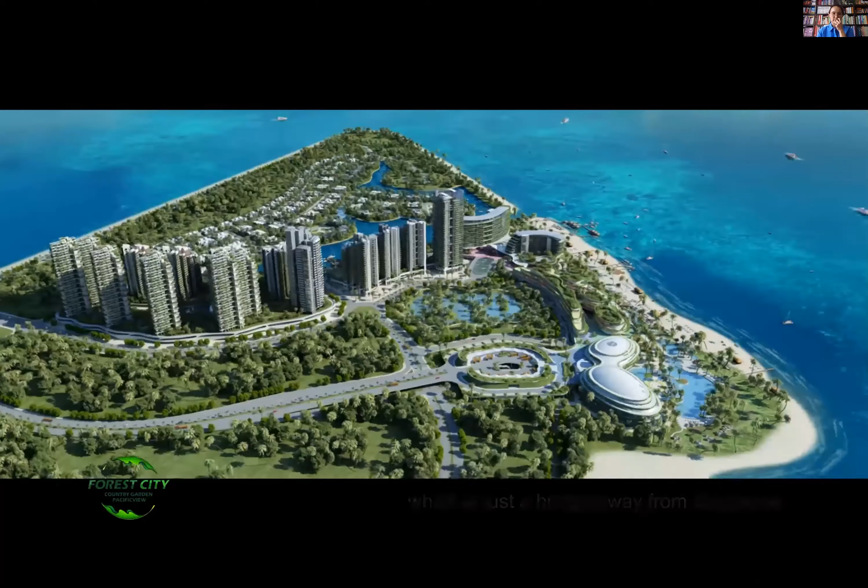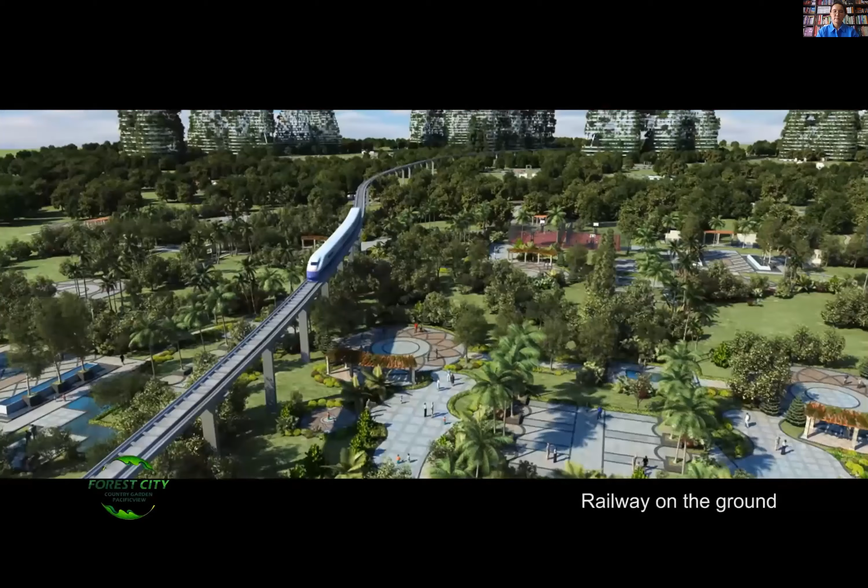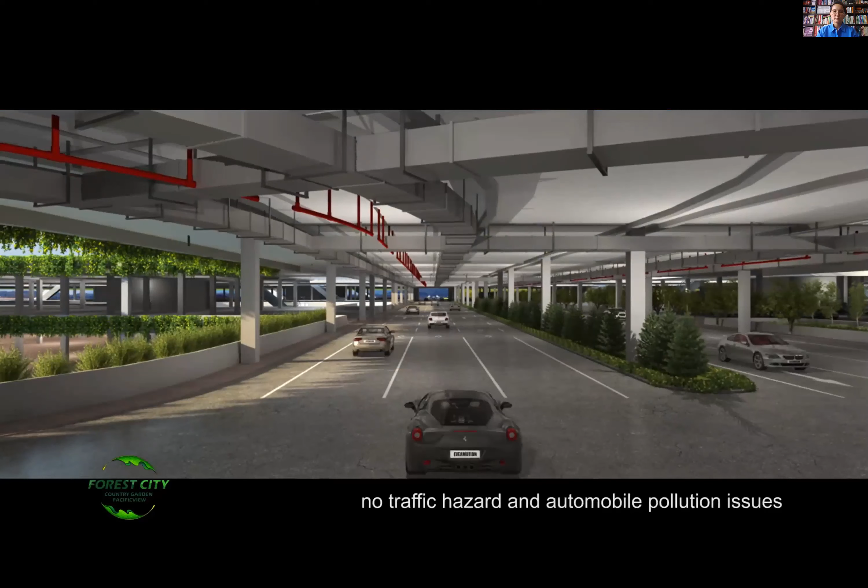Forest City, the one and only city, proudly presented by Country Garden Group and EDSB Group, a joint collaboration among Huawei, Sasaki, and Deloitte to shape the most vibrant city with world-class ecological standards in a premier enclave of Iskandar Economic Zone, just a bridge away from Singapore. The city applies the most advanced 3D multi-layered urban planning concept, able to accommodate hundreds of thousands of people. Lush green surroundings with no vehicles traveling around achieve true separation of pedestrians and vehicles, with railway on the ground and integration of multi-level transportation connecting the entire city. Underground layers consist of smooth vehicular traffic and ample parking, with no traffic hazards or automobile pollution. The entire city is full of vertical greeneries, sky gardens, and rooftop garden systems forming a natural barrier, with low energy consumption, air purification, rainwater conservation, and reduced noise. Building facades are covered with vegetation and greenery everywhere, and the city possesses a wonderful sea view.

All right, so that's one example. Now I'd like to share another one which has already been built. This project is an airport extension at Singapore Airport, a brand new building completed in April 2019, which will definitely set inspiration for this presentation.

Singapore. Can you guys see the screen? No? Okay, cool, good. Okay, perfect. All right, let's play this video.

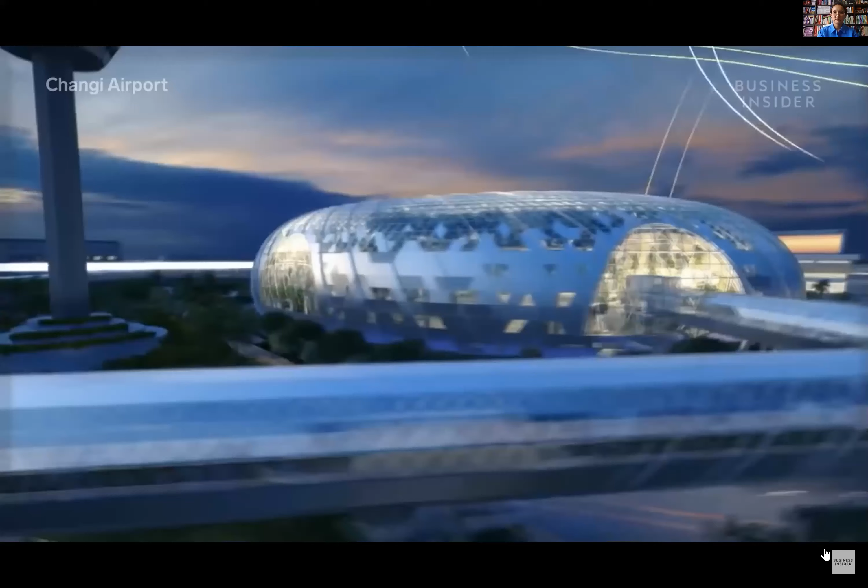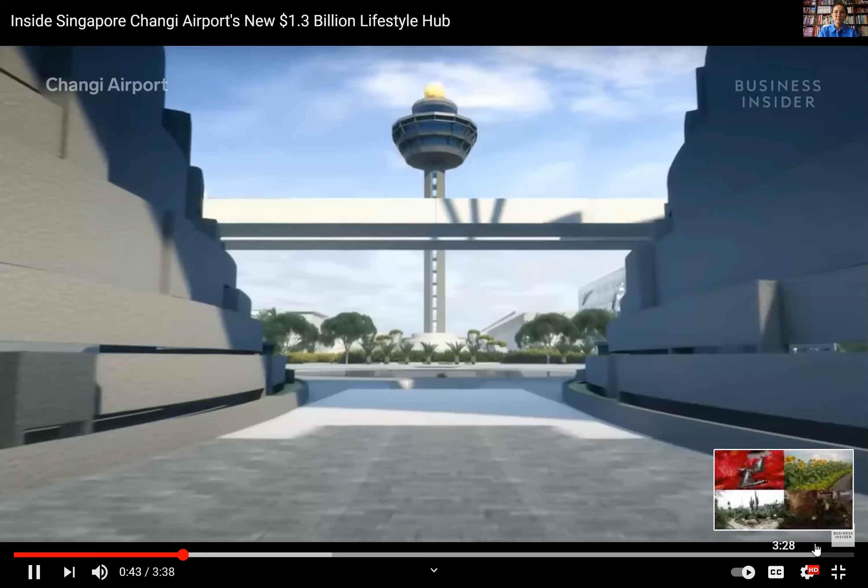Changi Airport has already snagged the title of World's Best Airport for 7 years running, and its newest expansion is only tightening its grip on the title. In April 2019, Changi opened Jewel, a lifestyle hub for the airport. The massive donut-shaped building sits between the control tower and Terminal 1. It took more than 4 years and $1.25 billion to build the glass and steel dome that makes up Jewel. Part luxury mall and part indoor rainforest, here's a look inside the complex, making layovers more fun. Built on what was once a parking lot, Jewel now covers 1.46 million square feet. It stands 10 stories tall, with 5 stories below ground and 5 above. It's huge. 280 shops and restaurants circle the perimeter of the glass dome. There's a multi-screen IMAX theater, a full-size supermarket, and a hotel. In the middle of it all is the rain vortex, a cascading funnel of water dropping 7 stories through the core of the building. At over 130 feet high, it's the tallest indoor waterfall in the world. All the water is harvested from rain and recirculated through the waterfall 24/7. At night, it keeps running and acts as a canvas for a 360-degree light show projected on it. Surrounding the rain vortex is a 4-story indoor forest. Singapore is known as a city in a garden, and the airport wanted to capture that theme at Jewel with the Shiseido Forest Valley. More than 900 trees and 60,000 shrubs from around the world make up the tiered gardens, with walking trails open 24/7 running through the gardens past waterfalls. The airport suggests allowing a half hour for each trail, but maybe allow more time based on the crowds.

All right, excellent. So let me switch to the presentation.

Irina, I'm sorry, excuse me for a second. I have a person with a number and I need the person's name. It only appears... one second, hold on. It only shows numbers. I'm missing a person's name, and if that person needs credit, I won't be able to give it to them.

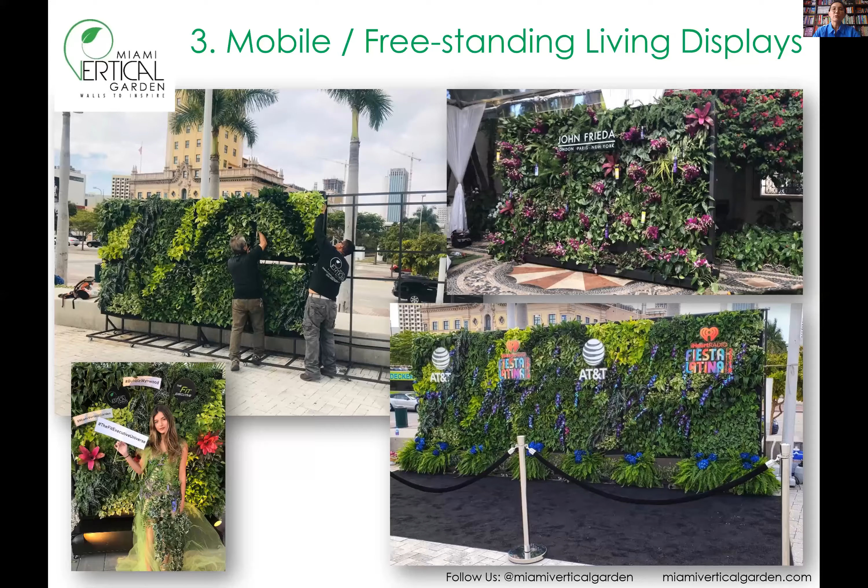All right, so now back on track. I would like to really systematize the knowledge that we have been exposed to, and share it in a structured fashion. So there are several applications to do the living wall: the classical living wall, living columns, and mobile displays, which are self-sufficient and can be moved around. But no matter what we do, our mission is to create inspiring vertical landmarks through commitment to high quality product standards, sustainable, green, innovative technology, and dedicated customer service. So there are three main components for the living wall to succeed.

One thing is, you can hire anyone to build a living wall, right? And this is probably where the quote applies: let the buyer beware. You have to do your due diligence on what the system offers and how it performs over time. If somebody guarantees a lifetime warranty or 15-year warranty, what are we warranting? Are we warranting the plastic tray? I can warranty the plastic tray for life, but that's not the point. The point is the plant performance over time. That's what matters, that's what has to be questioned, and that's what the judgment has to be based on—not the tray itself, but how the plants are going to evolve over time. That's the main concern when choosing to use the living wall application.

So what are the key success factors? You were absolutely right when I asked the question, what do you think is the challenge—and the number one answer people come up with is maintenance. We've been through many examples where clients would call us and bring us to the project asking for our advice and insider knowledge, asking what we can recommend, or whether we can take maintenance for the job. I can tell you our answer is typically no, because the key of the living wall is the system.

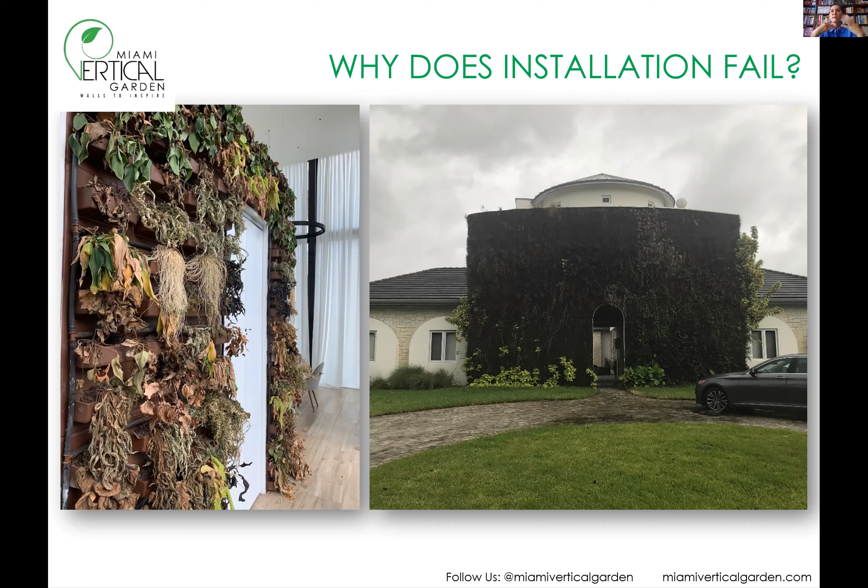All right, so the success factors when thinking about living walls are the following. There are 5 of them. The first is growing medium — in other words, where exactly the root is going to go and how it's going to get the nutrients. Second is irrigation. Again, irrigating something on a vertical surface is very different from just regular landscape irrigation.

Lighting, especially for interior applications — number 3 and number 4, lighting and plant selection, are related. A lot of living walls may fail simply because of wrong understanding of which plants should be used for a specific location. That is key knowledge when you design the living wall.

And finally, maintenance. Anyone who claims that living walls do not need maintenance because they are automated — I'm sorry, please don't take it as true. It's a big red flag to even hear people say that living walls are zero maintenance. We do hear those things as well. Just compare your garden — will you see the difference between any regular landscaping being maintained versus neglected? The same thing with living walls. What's the difference? It's the same.

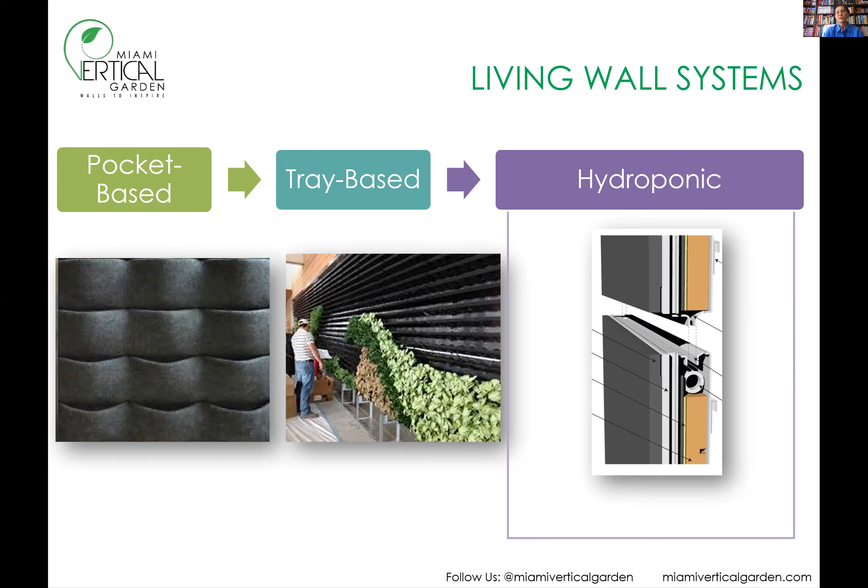What that means is that we have the same climate as Hawaii, Guam, Puerto Rico, and the Virgin Islands. How can you choose the same system that will be used in New York, which doesn't give you much of an advantage? You have to look at the situation that we are such a rare case climate-wise, that we have to take advantage of this climate and create systems that avoid constant replanting. Of course, if you live in a wall in New York, you expect seasonality and changes. Here, we should not—and that's what reduces the maintenance, if the system is right.

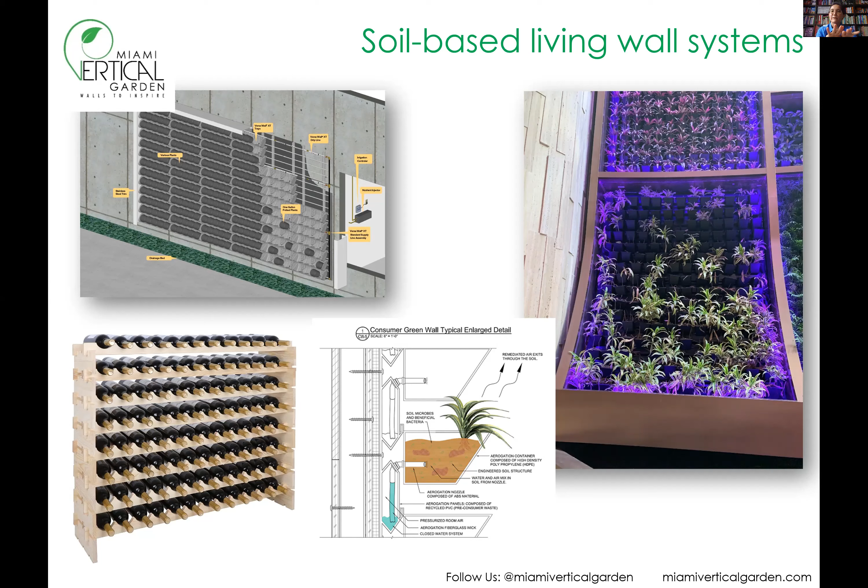So to us, anything container or planter based is like a wine rack—it's not really a living wall. This is an example of hydroponics that we are offering. One example is a panel-based system, where each standard panel is 3 feet by 3 feet, and you can see they are stacked on each other—they interlock with each other.

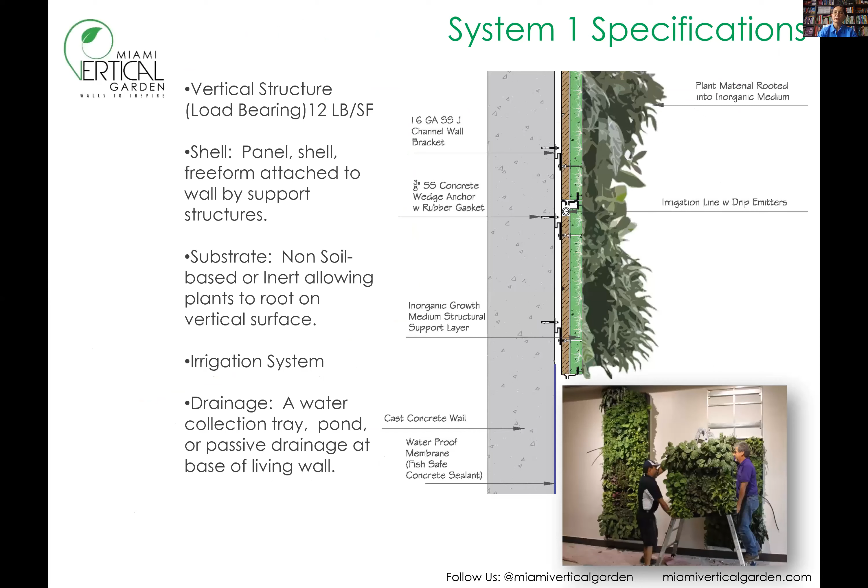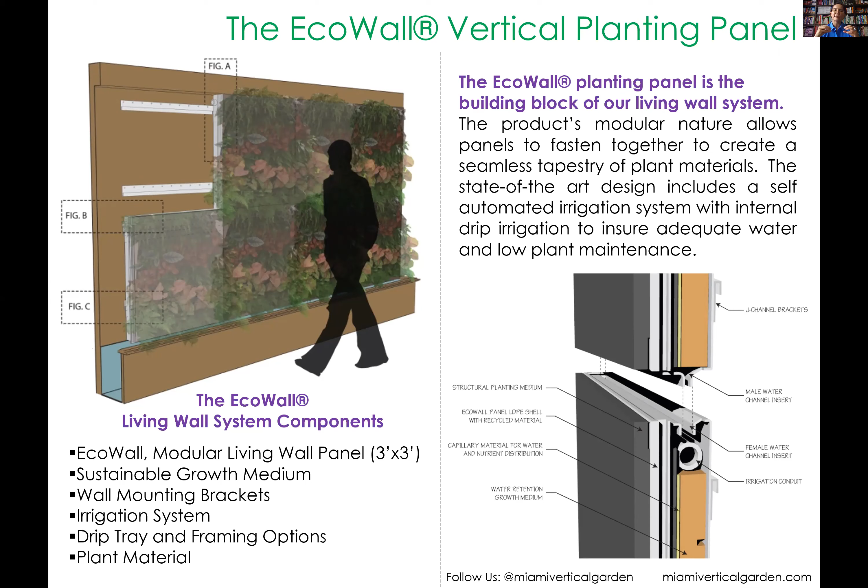The way it's done is that within the sealed shell, there are several layers of sponge. So imagine if water gets into the sponge—will it just go down, or does it have a tendency to actually fill the sponge and saturate it throughout the vertical surface?

That's what makes a difference. The second system is a pocket-based system, but inside the pocket we also do not have soil. We literally take the plant out of the container, wash it off, and wrap the root with sphagnum moss. Sphagnum moss is the same moss used for orchids.

So sphagnum moss becomes our growing medium inside the pocket for the plant to root. Just to explain the process, the way we do living walls, we pre-plant the living wall panels at our nursery. This reduces the time on the job site and gives us a lot of flexibility to do the work at the nursery instead of having all the plants delivered to the site. So we deliver pre-planted panels to the site, which allows us to start planting early so they can grow at the nursery, and then you get a fully established product.

Irrigation. There are two types of irrigation, and the good news is that living wall architecture can be integrated at any stage of the game - new construction, pre-construction, or existing facility - because the only thing we need is three things. We need a water source, which is a half-inch water line. We need to figure out the drainage, which is typically three-quarter inch. And we need to figure out where we're going to put the irrigation equipment, so an electric outlet - that's it.

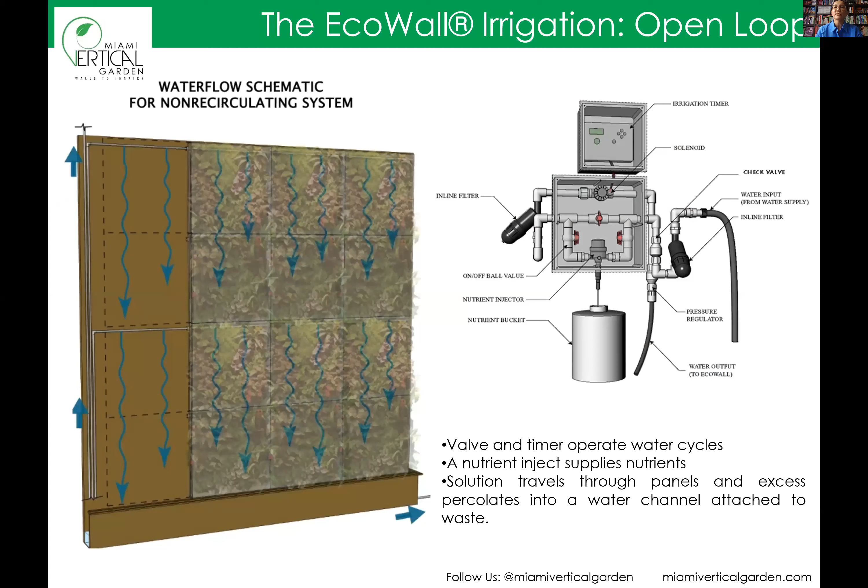The irrigation equipment is not massive. This is an example of how irrigation equipment plays out in two different alternative locations. We don't need a pump if we directly connect to the water - we only need a timer. We have a special filter, and we have a container for the nutrients. Again, when you get the presentation, you'll see more details. I'm not going to stop here.

Lighting. Lighting is very critical for installation. So I'm looking at my time - alright, another 5 to 7 minutes, and then I'll open up for questions.

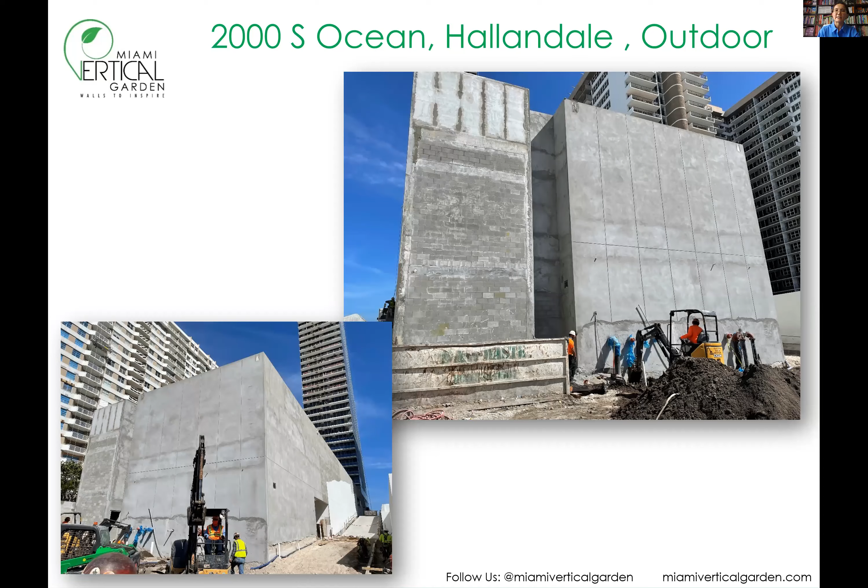I can tell you we have zero failures. This is one of the jobs we've recently been contracted for, and it will be our largest installation — the 2000 Ocean Hallandale condo building. This is a conceptual rendering showing a whole facade of the front. The project is due May 2021, and I can't wait to share it with you.